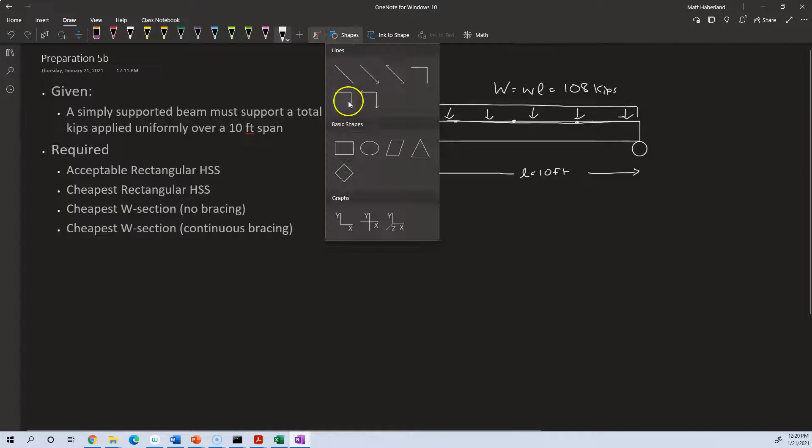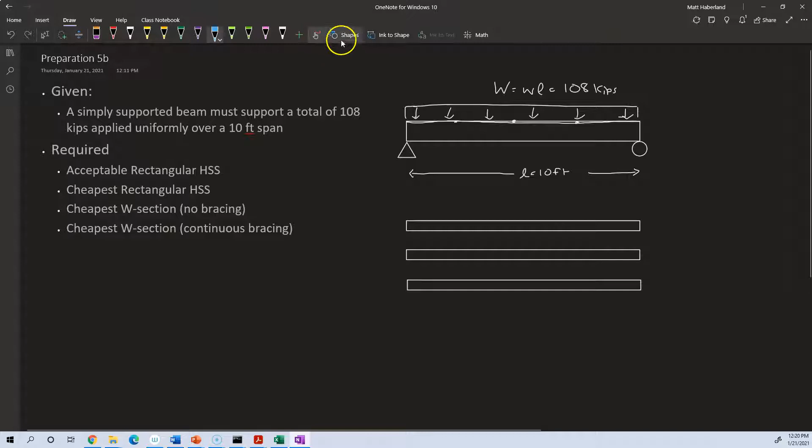The second case is when there's continuous bracing, meaning there's a plate of steel all along the top that is supported. One way to achieve that, let's draw a picture: you've got multiple I-beams, W sections, viewed from the top, several of them, and over the top of all of them maybe you'll have wood or a concrete slab or steel plate, something like that. It can be thin, but it's over all of them, and it holds them together so they stabilize each other against deflections.

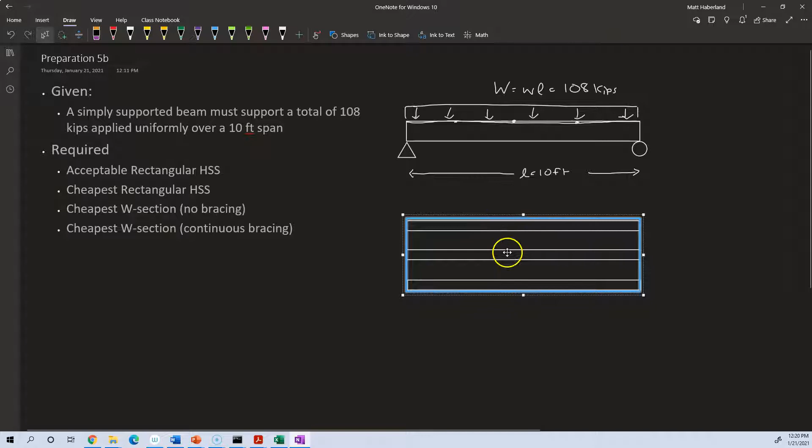All right, so let's find any old acceptable rectangular hollow structural section. Now we choose sections based on their moment carrying capacity. For a hollow structural section, we want to find something for which the moment, the plastic moment, or let's use the nominal moment over the omega of bending, is greater than or equal to the maximum moment we experience inside our beam.

So these are tabulated for hollow structural sections. This is something we're going to have to calculate based on our load of 108 kips. So remembering from the beginning of the preparation, we said that in Chapter 3, Table 3-23, there is a shear, moments and deflections table. Let's find that.

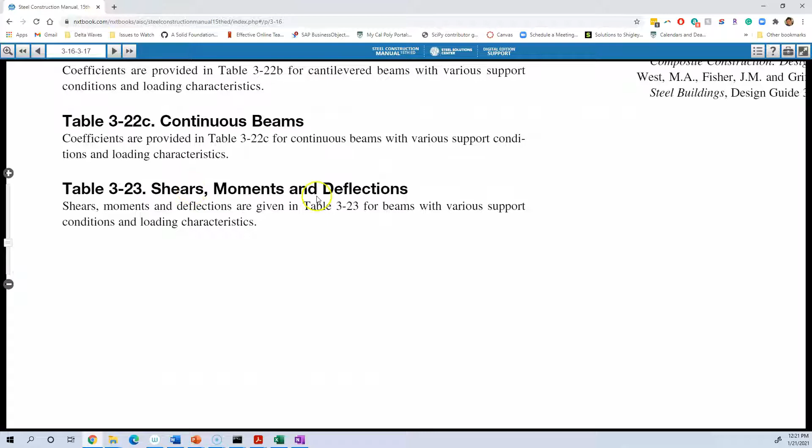I've given the simplest loading condition we can have, which is the uniformly distributed load. But we've already talked about more complicated cases, right? We've used the Shigley book and the equivalent table, I think it's A9, that shows us how we can use superposition to break down more complicated loads into these simple loads, and find the maximum moment experienced anywhere in the beam. For this case, it's really simple: it's a uniformly distributed load. The maximum moment occurs at the center, and it is lowercase w times L squared over 8, where the total uniform load is lowercase w times L.

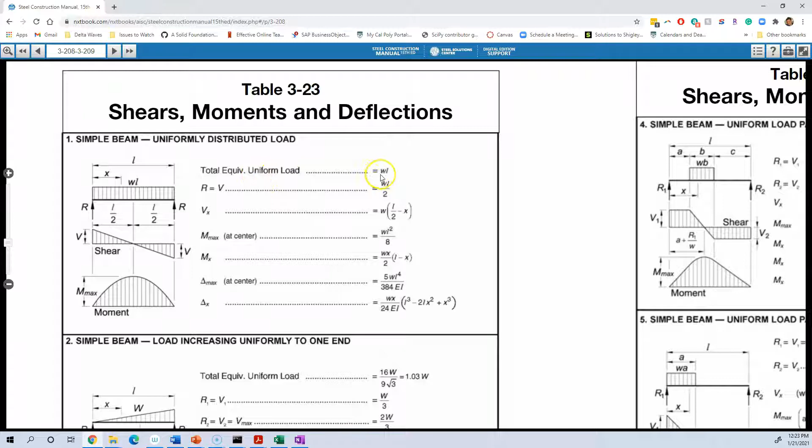So let's write those things down. I've already written the first one: lowercase w times L is 108. So we want to find out what lowercase w is, that's capital W over the length, 108 divided by 10 feet, which is 10.8 kips per foot. Then the maximum moment, M max, which occurs at the center of the beam, is lowercase w L squared over 8, or equivalently capital W times L over 8. That is 135 kip feet.

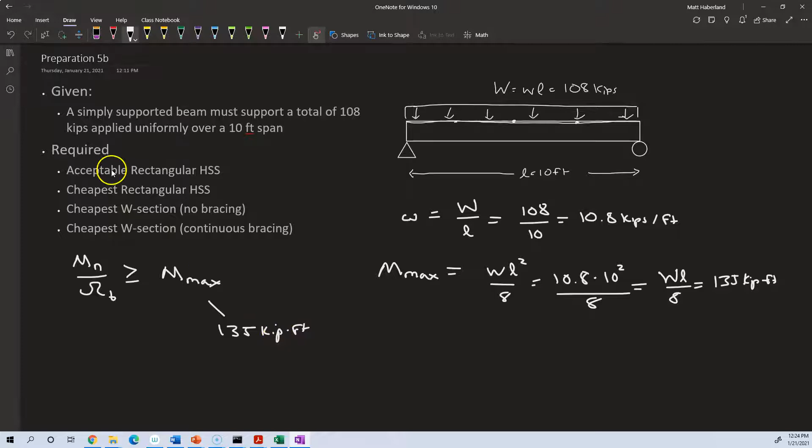We want to find any old acceptable rectangular hollow structural section that supports that. We need to find one for which the available flexural strength, the nominal moment available, equals the MP, the fully plastic moment, divided by our factor of safety, using ASD, allowable strength design safety factor, which is 1.67 — we can look it up in the table. So we're going to design this so that it's bending about the strong axis.

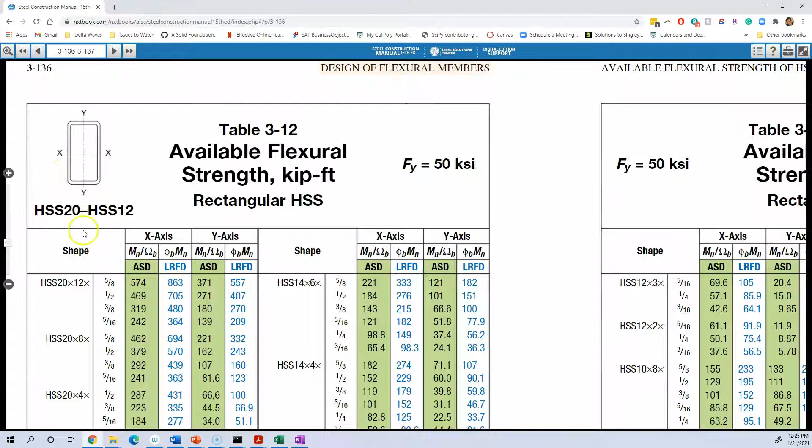Okay, this one works, right?

Hollow structural section 20 by 12 by 5/8. Our available flexural strength is 574 kip feet, which is greater than 135, so almost anything on this page is going to work. You would not be able to use HSS 14 by 4 by 3/8 though, because that has an available flexural strength of only 119 kip feet, so that's not going to be enough.

So that part was easy. You just look up in the green column for ASD any section that has an available flexural strength greater than what you require. But the cheapest rectangular hollow structural section, how do you find that?

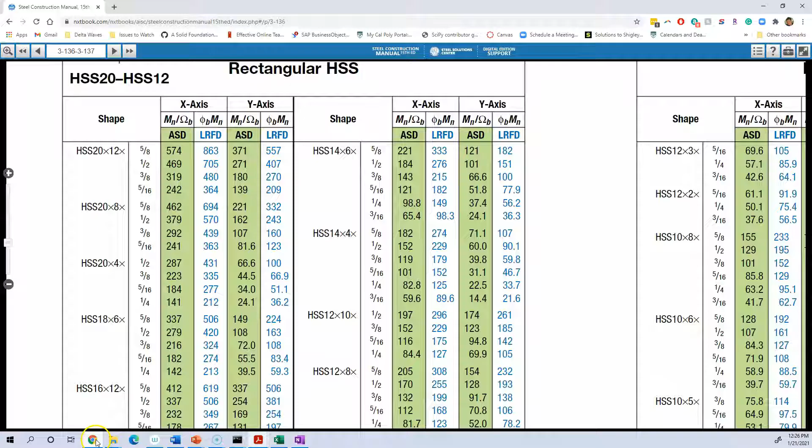Well, that's a little tougher. Unfortunately, since we said cheapest, the costs aren't listed here, and the weights are not listed here. By weight, I mean the weight per unit length, the weight per foot. So it's kind of tough.

You'd have to look for a small section. Typically it's laid out from big, deep sections, and the second numbers correspond with their width, and the thickness is here. So you'd probably want to look further down in the table, for something with the thinnest walls and the smallest width. Smaller width is probably better. Thin walls, small width, really deep is probably what you want. But it's kind of hard to tell.

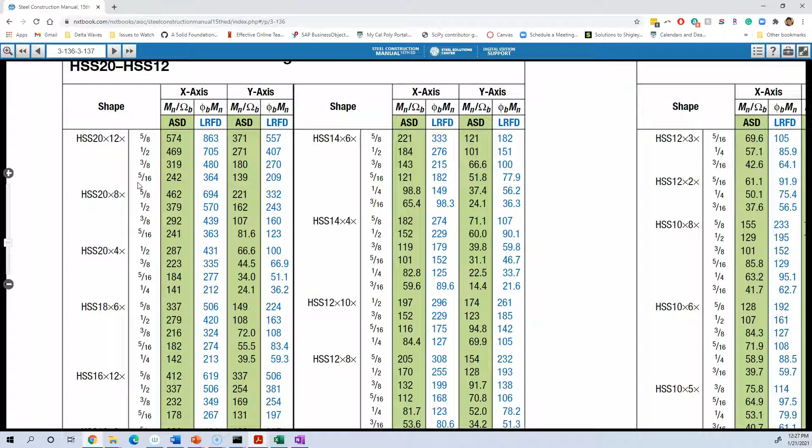This table is not the best place to choose the least expensive hollow structural section. It might be a good place to confirm your pick, but I think the best way to choose the cheapest hollow structural section is actually that table from part 1.

What we want to do is say, alright, the hollow structural section is made out of material with a yield strength Fy equals 50. So we know Fy equals 50. Another way we can do this: we know that Mn over omega b, where Mn is our fully plastic moment, which we just learned about, equals the yield strength times the plastic section modulus z.

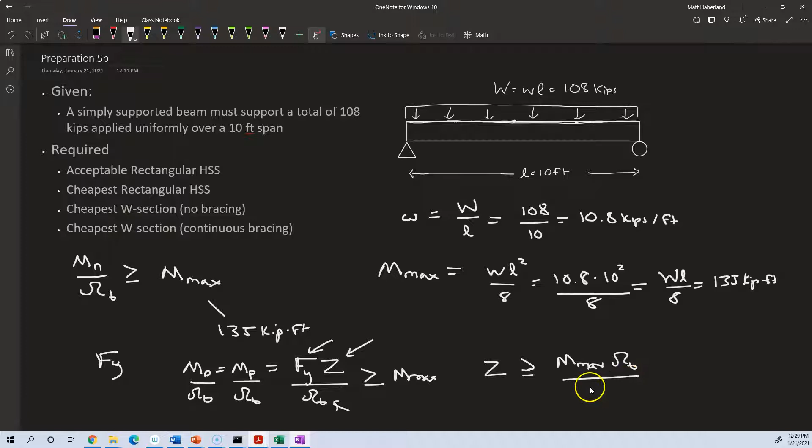So if we divide both sides by omega, we want to choose that so it's greater than the maximum moment you experience in the beam. We know what our safety factor is, 1.67. We are going to solve for z, so z needs to be greater than or equal to M max times our safety factor divided by our yield strength.

So let's calculate what z needs to be greater than. This equals 135 kip feet times 1.67 divided by 50 KSI. Now we have to be careful here: this is in kip feet, this is dimensionless, and this is in kips per inches squared, or KSI. So we're going to take this and multiply it by 12 to change it from kip feet to kip inches.

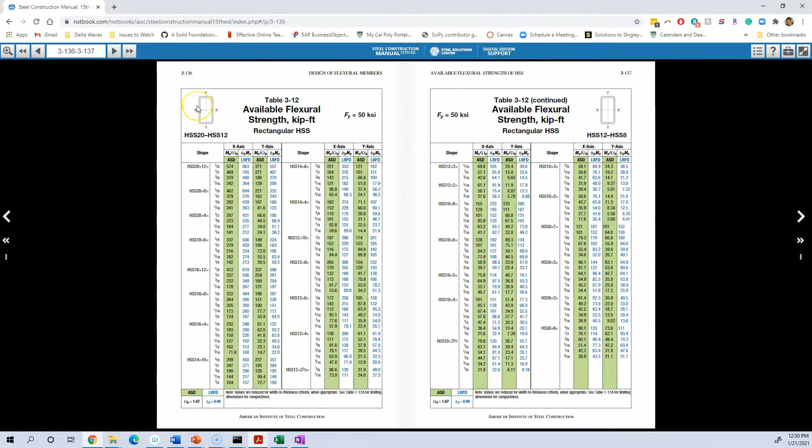We're looking for a z that is greater than 54.1 inches cubed. Then we need to find the lightest beam that has that z. So we look in part 1, table 1-11, which has our rectangular hollow structural sections.

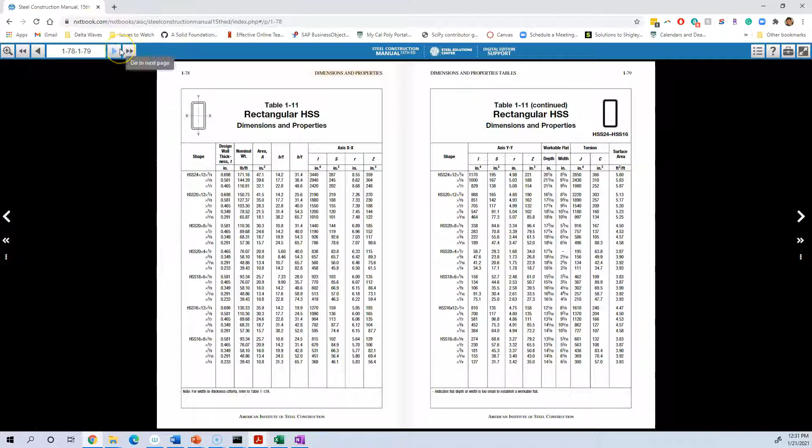So I like to start at the back. Let's flip a few pages over. Alright, so we're not seeing anywhere near what we need on this page, for instance. We've gone a little too far, and that's okay. All of the z's we see here, 13.4, 12, 21.9, are much less than what we need. We want to find a page where none of them are close to what we need. We need 54.1, so those are not even close.

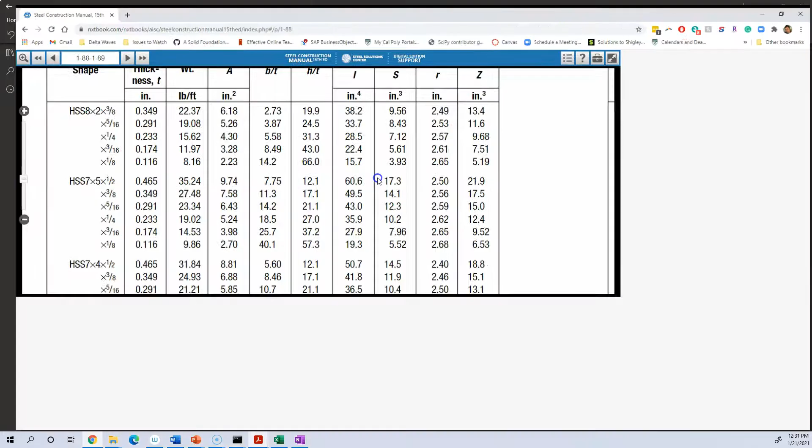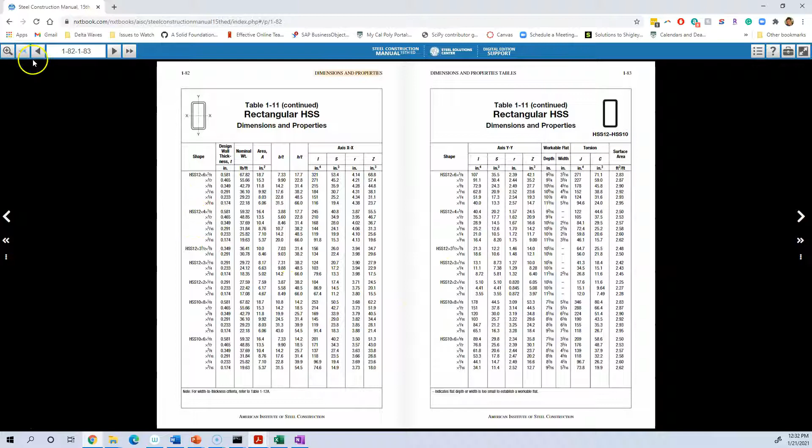So then we're starting towards the back, and we're going to look for larger sections. Alright, so now we're at a page with a little bit larger sections, still not quite what we need. Let's see, it looks like this one's getting close: HSS 9 by 7 by 5/8, 48.3, still not what we need. Okay, now we're at a page where the sections are starting to get big enough, and again we're looking for 54.1.

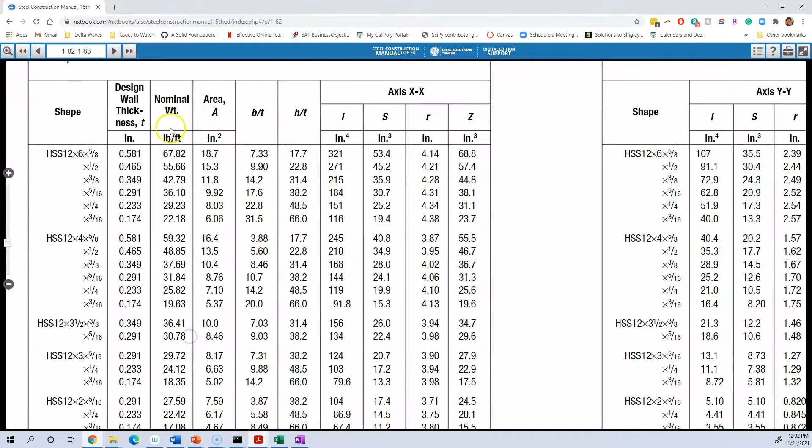So HSS 10 by 6 by 5/8, this one's not going to work. Some of these sections are going to work. HSS 10 by 8 by 5/8 is going to work. This is a candidate, and it has a nominal weight of 67.82 pounds per foot.

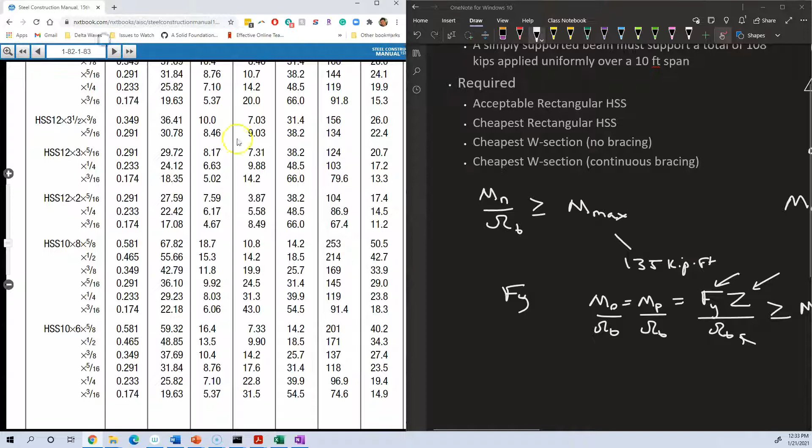So I'm going to mark that down. I'm going to be really careful and actually write it down. When you get the hang of this, you don't have to write everything down, but on your homeworks, please do write everything down.

So I'm going to make a little table, and what I'm going to say is the z that I need is equal to 54.1, so I need it to be greater than that. And then what is the weight, little lowercase w, pounds per foot, and then the shape. Okay, so we found that the 10 by 8 by 5/8 had a z in the last column.

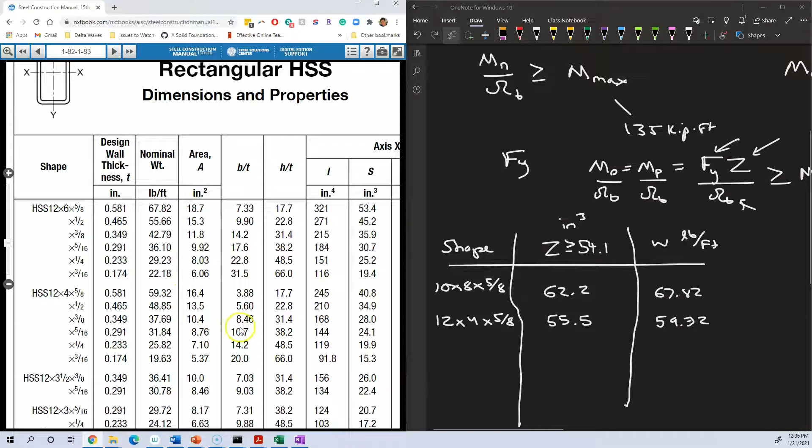Now look, even though it was much wider, it's way skinnier. So it's wider, but it's smaller wall thickness, so it's going to be a more efficient shape for us. And by efficient, in this case, I mean moment carrying capacity per unit weight. So maybe efficient is not the best word.

Let's keep on looking up the table. 61.1, where we were. Let's keep going up. Here's 61, 55.66 - no, that's not what we want. 57.3, that's okay, 47.9, okay. 57.3, the weight is smaller than what our best one is so far, 47.9, and that comes out of an HSS 14 by 6 by 3/8.

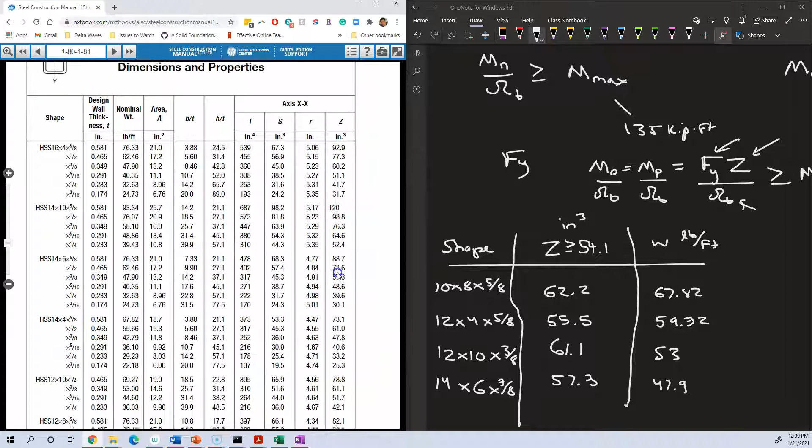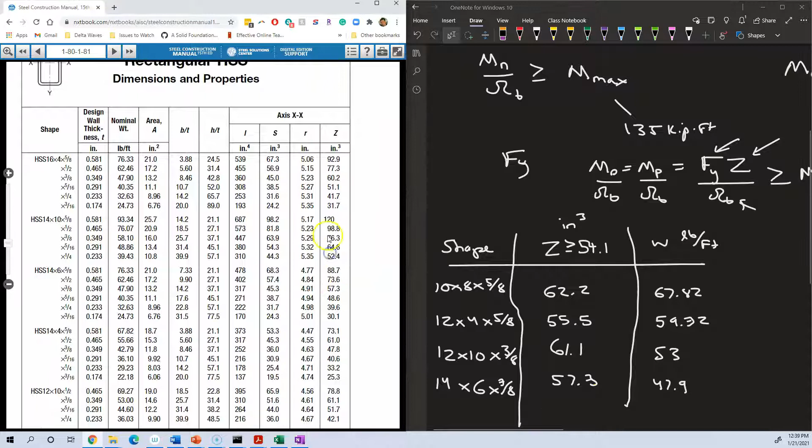We don't have to look at the rest of this shape - the thicker ones are always going to be heavier, so we don't have to look at that. We just need to look up the table, the next shape. 64.6, the weight is 48.86 - that's not better than we've seen, so we can ignore the rest of this shape. 47.9, that's the same as we already have, so I think I can ignore that.

Oh, 39.43 for a Z of 56.4. 39.43 is the weight, and that is an HSS 16 by 8 by 1/4.

Again, thinner is better. And it looks like, let's see, is that our best? We could go to the 59.4. So this doesn't work, right? That's a heavier weight. This one satisfies our criteria - Z is greater than 54.1, but its weight is the same as we currently have.

Same sort of thing here, 61.5, 39.43 is the weight. And then above this, we only have heavier sections, right? We can stop when we get to all the sections that are heavier. So maybe actually the best one, I should probably write down HSS 20 by 4 by 1/4. This has a Z of 61.5, which is actually higher than this one. That's okay, because it has the same weight, 39.43 - this is a 20 by 4 by 1/4.

And I don't know, in between there, we might want to put this shape, 18 by 6 by 1/4. These all have the same weight, but they have different Z's. I'm going to choose the one probably with the highest Z, assuming that these three sections, because they weigh the same, are going to be the same cost.

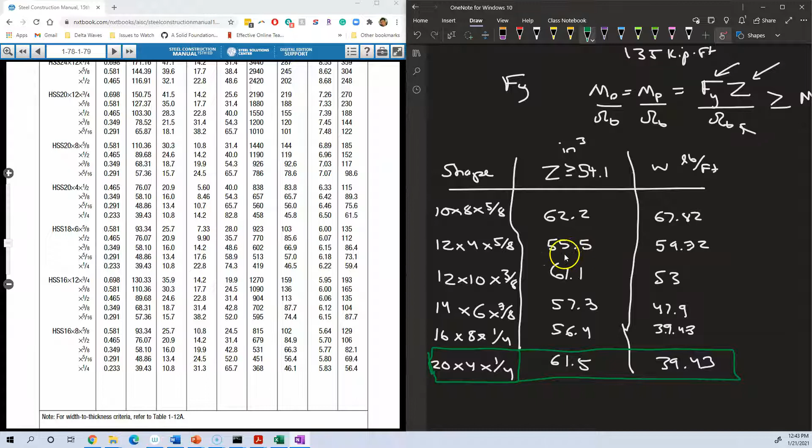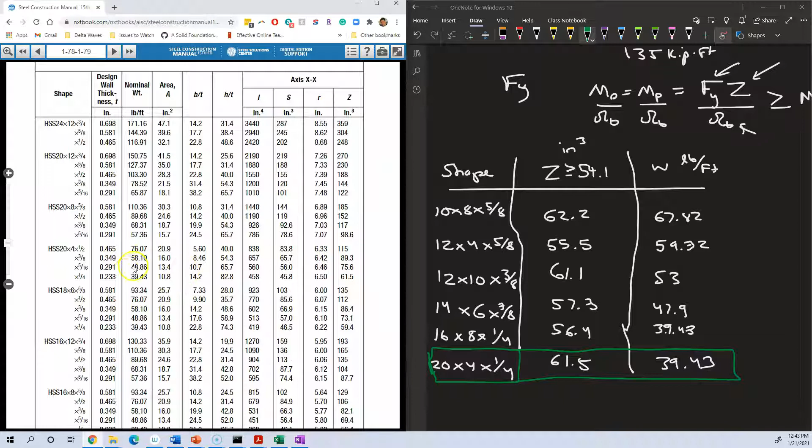You go towards the back of the table and look your way up. You start with the first section you find that has a Z greater than what you need, write down its weight, and keep going up the table looking for Z's that also meet your requirement and have lighter weight than the last one you wrote down, until you stop when you find there's nothing lighter for the rest of the way.

Before you declare victory, what we've done so far is find the lightest, hopefully cheapest, section with a plastic section modulus greater than we need. This is appropriate under the assumption that the moment carrying capacity is proportional to the section modulus — that the nominal moment divided by the safety factor, the available flexural strength, is equal to Fy times Z over our safety factor.

So this equation is always true — that's how the plastic moment is defined. The fully plastic moment is simply the product of the yield strength and the plastic section modulus. But it's not always true that the nominal flexural strength is equal to the plastic moment.

Other things can happen. Just like you saw with beams in the video, long beams can experience lateral torsional buckling. Very thin sections of tubes, the walls can crumple — they can experience what's technically called local buckling. It's not buckling where it bows out of the plane, though that can happen with extremely long, very tall sections, but that's not typically something you need to worry about. What can happen is these paper-thin walls, relative to how tall they are, can buckle locally. I'll show you some videos of that.

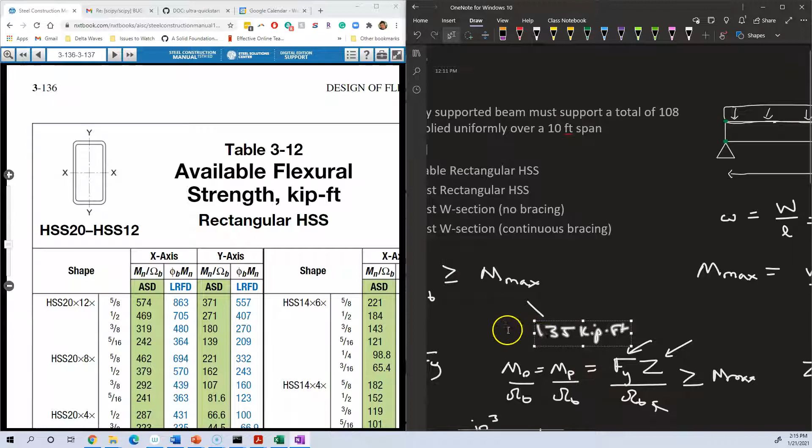So what you should do is go back and double check your answers. Take a look through this table and look up the strengths. Ultimately, what we were after in this roundabout process was something that can handle more than 135 kip-feet. We found what Z would be so we could find the lightest section with that Z, because table 3-12 lists the available flexural strength, Mn over omega b, which is exactly what we want, but it doesn't list weights.

So we went to the other table because it had weights, but we need to check our work, because it's not necessarily true that the nominal moment equals the fully plastic moment — the available flexural strength might not equal the plastic moment divided by the safety factor.

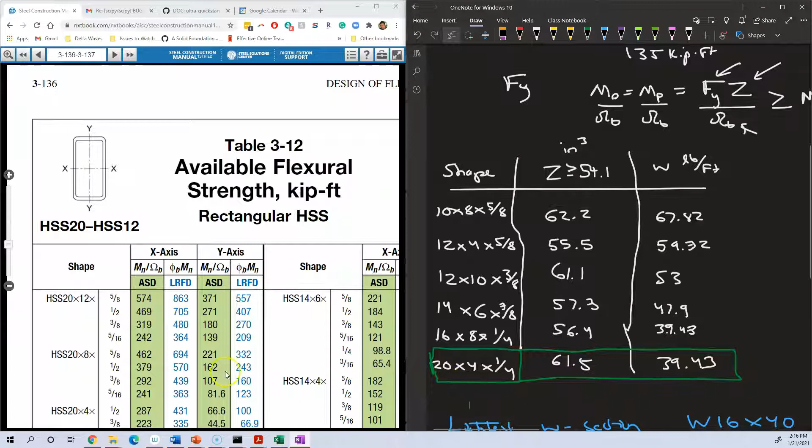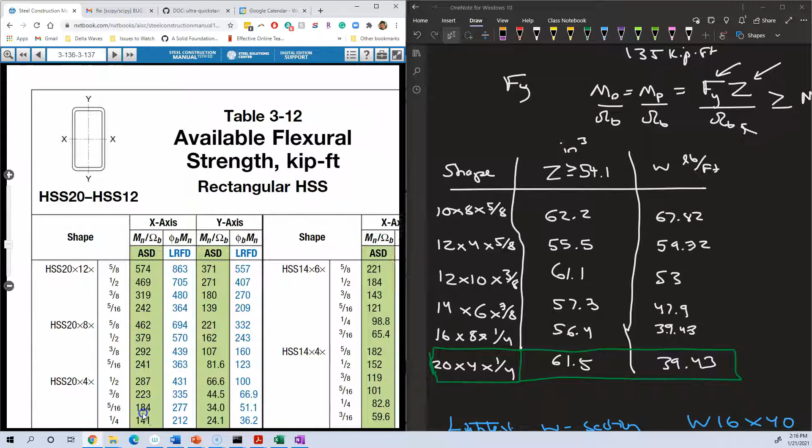So let's check. The 20 by 4 by 1/4 is right here, and indeed it has an Mn over omega b of 141 kip-feet, so we are okay. Now, had we chosen the 16 by 8 by 1/4, actually we need 135 kip-feet.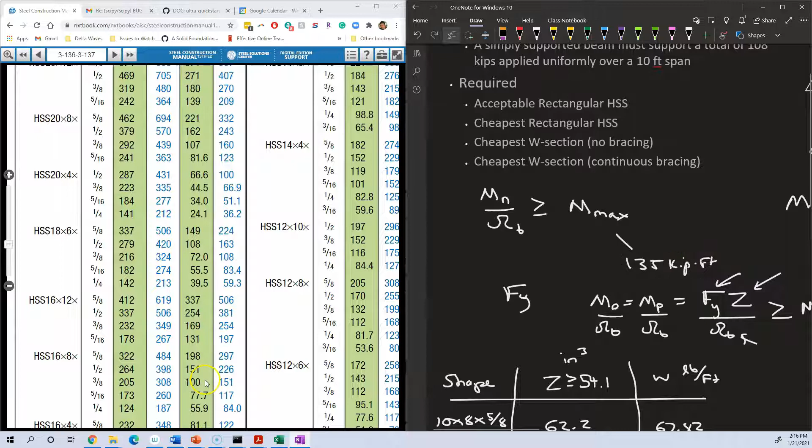It's a good thing we kept going, right? Because even though these had the same Z exceeding what we needed and the same weight, we said we could have stopped here, but we kept going because we could get the same weight with a higher Z using the 20 by 4 by 1/4. But had we stopped at the 16 by 8 by 1/4, that has an available flexural strength of only 124 kip-feet, which is less than the 135 kip-feet we need.

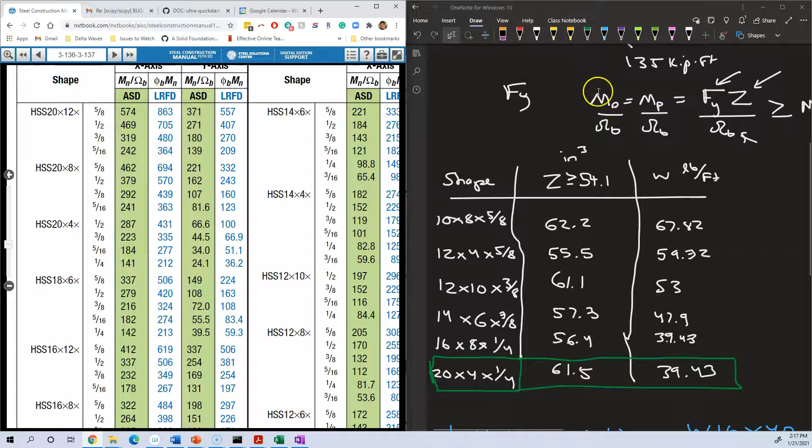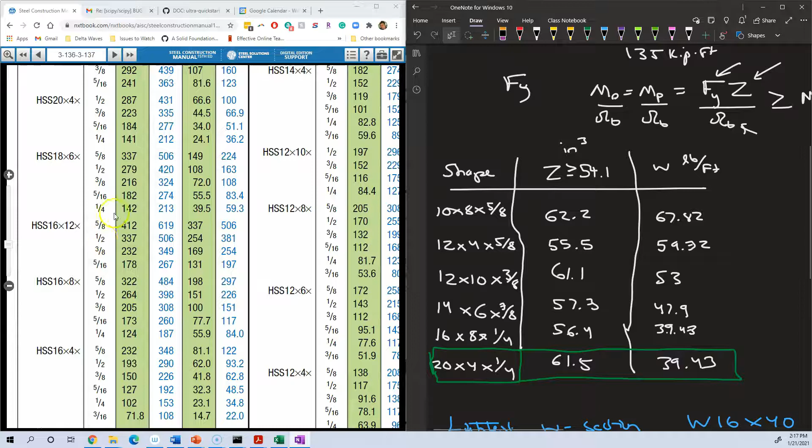So fortunately, we don't have to go back in our table. What you would do, if this section had not had enough available flexural strength — if the nominal flexural strength turned out not to be the same as the fully plastic moment due to some local buckling — is go back through the table and keep looking backwards until you find one that checks out. Fortunately, the very last one in our table, the lightest one with the highest Z, turned out to have the available flexural strength we need, 141.